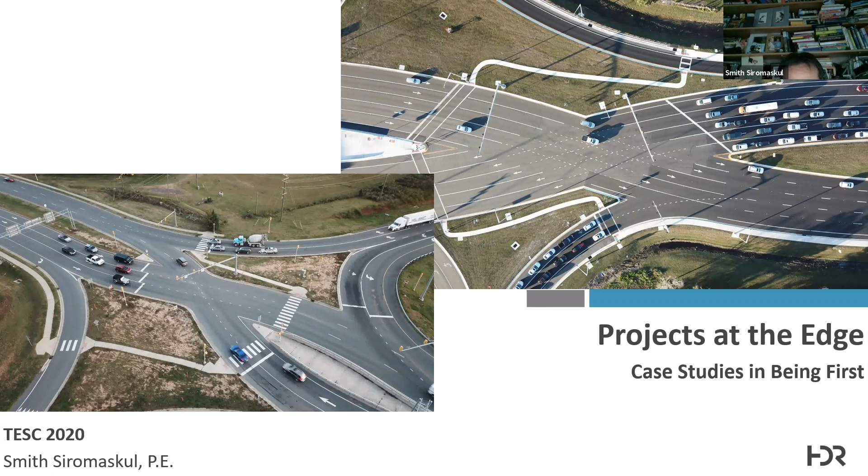So what I want to start with are a couple of projects. I'm going to weave in a couple of case studies, and basically, if you've seen me present before, I'm going to do something a little different this time: I'm going to tell you all the places where I've screwed up in the past. So this is going to cover a lot of lessons learned from planning through design, all the way through implementation. Sorry if my camera is now pointed over my head, but I'm going to be doing some drawing, so that's kind of unavoidable.

But anyway, what I want to point out first is what you see on the screen right now. This is the University Parkway DDI in Sarasota, Florida, I-75 and University Parkway. It is the largest DDI on the planet at this time, with a total of 12 lanes in the interchange core. The old interchange here used to be a standard diamond, and to put this in perspective, the dual left turns at this diamond used to have storage that went back 4,200 feet in each direction. That's how much volume was trying to get on I-75 at this point in time, and that actually comes into play in a little bit later portions of this story.

One of the first things I want to say is make sure you choose the right software. The original concept developed for this interchange was done using simple Synchro analysis, and to say the very least, the number of lanes that were going to be needed here far exceeded what was proposed as part of the original base design. The final design concept was done using VISSIM analysis. Not to say that VISSIM is the only tool, but you really need to look at microsimulation. The reason is that lane utilization coming through the interchange, through the crossovers, how they interact with adjacent intersections, how they're fed by adjacent intersections—all of those play a role in how you need to lay out your interchange.

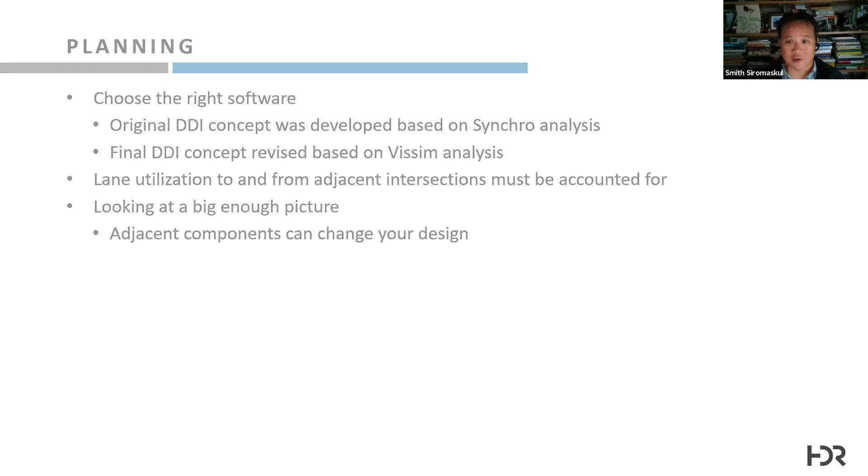Make sure that you look at a big enough picture, because the stuff that's right next door will often change how your project needs to be designed and what needs to be accounted for.

This is the I-85 project, a DDI I put in the ground back in 2012-ish, the first one completed in the state of North Carolina. There was a full access intersection located right here, and no matter what interchange you were looking at—single point, diamond, whatever—the presence of this intersection was going to be a problem. There was also a very heavy movement that wanted to come back this way and either head south or north on 85, and having that extremely limited space between the interchange and that intersection was going to be problematic.

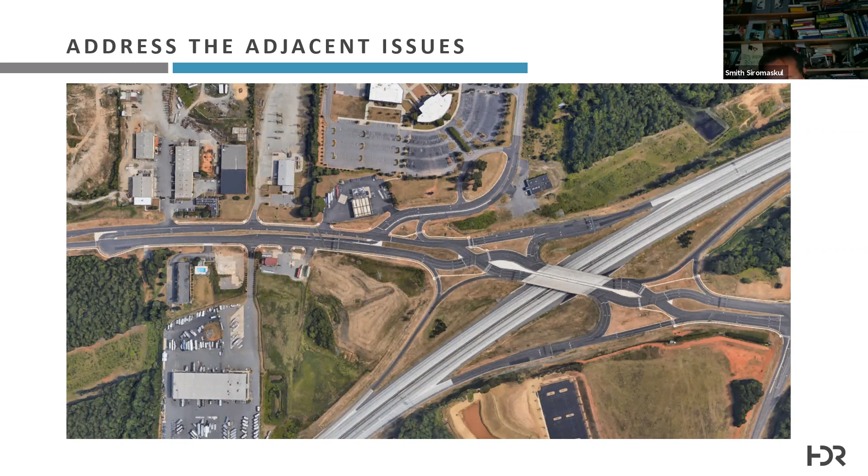So for this project, not only did we look at this intersection and the ramp terminals, which were in scope, but the way we handled that movement ended up extending our project limits off to the west. Basically what you have here is a partial R-Cut, or restricted crossing U-turn, although at the time we put this in, that really wasn't an acronym that was widespread or well known.

This is a mistake that we made in Utah. What you're seeing here is the east leg of an intersection—I forget exactly which one—but this is on the I-15 Core project. We worked on this around 2013, 2014.

Once this was open to traffic, you had 2 lanes coming out of the DDI and a 3rd lane coming off the ramp, with enough width for a 3-lane section. What they did originally was run this as an add lane that continued on down that road.

The problem is, geometrically, this curve coming off the main line doesn't reach its point of tangency until a little ways down that section, and the curve coming across the ramp also doesn't reach tangency until the lanes have merged. This driveway became problematic because people would reach this point and cheat the end of the section, since there was no physical barrier, just paint. So they'd drift across and hit that intersection, causing a lot of sideswipe accidents at that location.

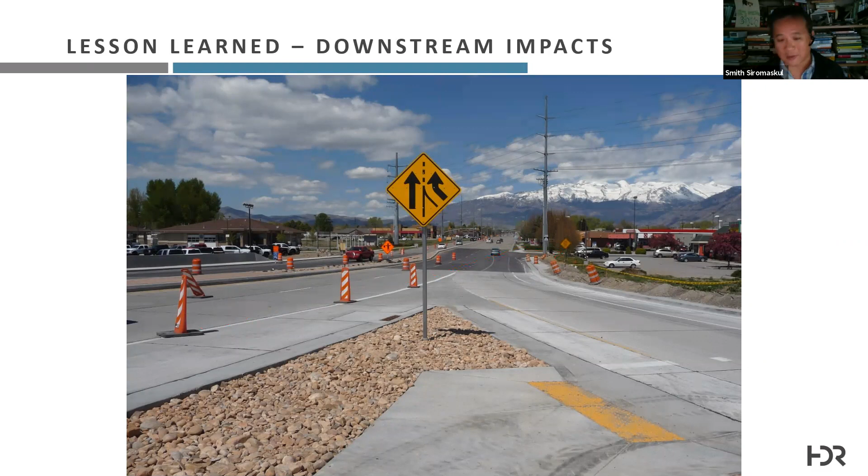That was later mitigated through some additional signing and striping, but the gist of it is we're really not going to do anything like that again.

Now, if your project is limited to the interchange itself, that doesn't give you an excuse to ignore anything outside the bounds of the project. In this case, this is I-25 and College Drive in Cheyenne, Wyoming—far and away the smallest DDI you're probably going to see. It used to be a 4-lane diamond, converted to a 2-lane DDI, with very strict project limits.

We could not modify any of the driveway radii located at those 2 points, and we needed to maintain the existing bridge here and here—basically we just had the section in here to work with. What I want to point out is, we were told we couldn't touch those driveway radii; however, if you look at the driveways, you have a McDonald's over here and truck stops in the other 3 quadrants, so you know there's going to be a lot of traffic coming off the interchange and accessing those driveways, turning left, turning right.

This is the cheapest location to get gas along I-80 in the state of Wyoming, and during peak periods it sees 55% trucks—a massive truck percentage. So for example, we had the capability to have 2 lanes going away from the interchange since we only had one coming through the core. We could have made the right turn off the off-ramp an add lane, but instead, on both sides, we intentionally pinched it down so that right here and right here you're down to a single lane.

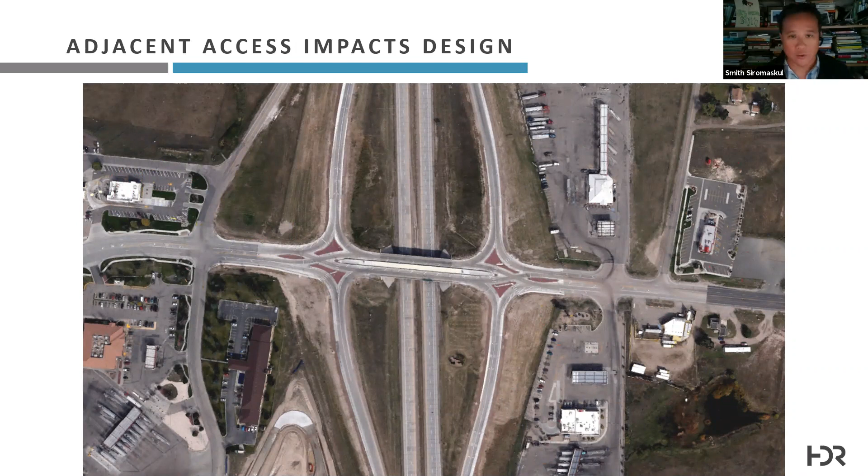So this is an instance that I want to demonstrate, or that I want to get the point across, that what happens outside of your study area, what happens outside of your limits of construction, in some cases will absolutely drive what you do within your limits of construction. So just because it's out of your scope doesn't mean you can just forget about it.

Now, when it comes to public involvement, there's always this fear that, oh my God, you're driving on the wrong side of the street, everybody's going to die, my constituents are awful, what have you. What we found in the DDI implementations we put in so far is that the fear of how the general public was going to receive it was far, far worse than how they actually received it.

What we have done is we've gone out and made sure that in a lot of these firsts, they involved showing people, and oftentimes showing agency staff and elected officials, what it would look like from the driver's perspective. Instead of a normal public information campaign, it was almost more of a public education campaign.

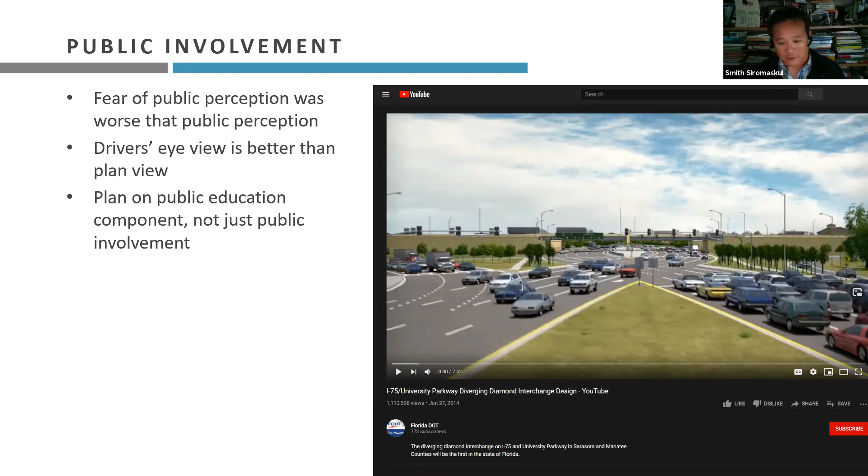And that's something you see on the screen on the right side - this is a YouTube shot of what is FDOT's single most viewed video ever on YouTube. As of the time I grabbed this screenshot, we're looking at just over 1.1 million views.

A couple of different things that we went out of our way to do on this interchange. We had quarterly update meetings, and we invited college engineering students and high school students to attend these to really get a behind the scenes look at what it really takes to engineer a project and get it into the ground.

We used a lot of heavy social media presence on Facebook, on Twitter, and had a project website.

At the public meeting, we had two different things going on. Number one, we had a station where you could grab a wheel, had pedals, and you could drive through a 3D rendering of this DDI. That did not get as much attention as a giant - and I'm talking massive, like 8-foot long - plot of the DDI interchange.

At University, and a pile of Hot Wheels cars that people could actually just manually trace through the interchange. That seemed to be the focal point of our public outreach, and people really, really liked that.

Now, here's the big catch. You need to have staff that's going to be knowledgeable up and down the entire chain, because everyone that people see out in the field is going to get asked, what are you doing? How does this work? Et cetera. So really early on, we realized we needed to create talking points that pretty much everybody up and down the chain involved with the project was aware of.

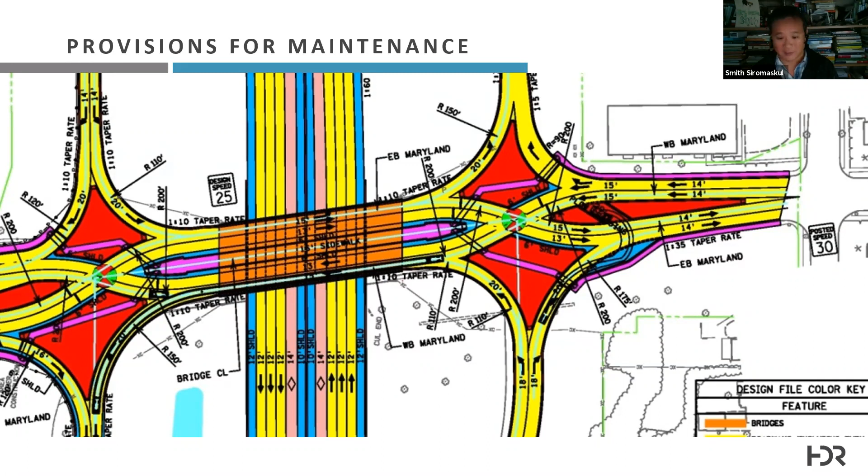This distance right here, if you look, there's actually an AutoTURN template that's in there. And right in this location, we actually modified the alignment to pull the two directions far enough apart to perfectly store snow maintenance equipment inside that median to allow that traffic to go from ramp to ramp when they're actually engaging in snow maintenance activities. So this is another one of those things where something that we don't typically think about affecting design had a significant effect on the design, because we did have to change the alignment in order to make those accommodations.

In construction, one of the things that we did for University Parkway was a very, very heavy social media presence and website presence. And when we were at the public meetings, we collected phone numbers and we texted people updates on MOT changes, design changes, detour changes, and things like that.

One of the things that we noted right off the bat, and you can kind of see it here, I'm going to highlight a couple of these lines right in here. These lines all through here were remnants of the existing diamond striping. And during construction, that made this core of the interchange quite confusing because you still saw the old stripes in there before they were able to lay everything over and get rid of the temporary striping. So it kind of created some complications. It's just something that we did not think about necessarily when we started laying out the MOT for this.

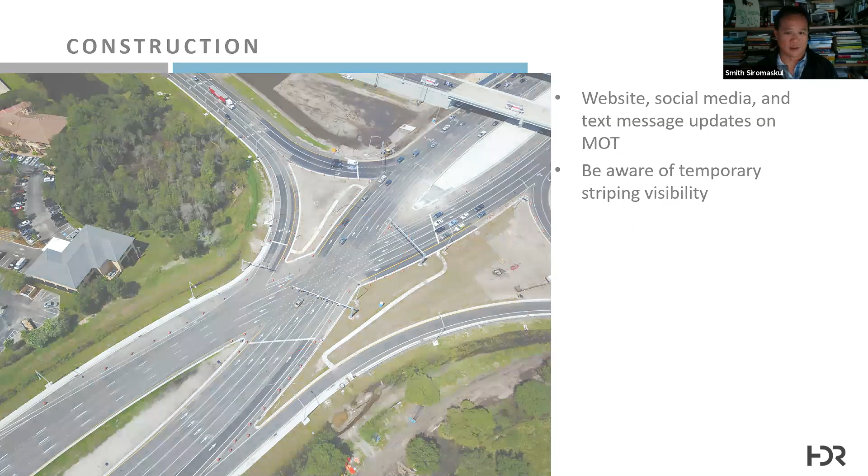Now, post-implementation, there are a couple things that I want to point out here. Clearance time controller issues, you can kind of see the outline that we're talking about there on the left. Now, timing issues. One thing that I want you to call attention to is when the through traffic gets released, the turn traffic in this case gets released. And that'll happen here in a moment where the traffic coming from right to left is going to get its green. And there you go. That right there should not happen.

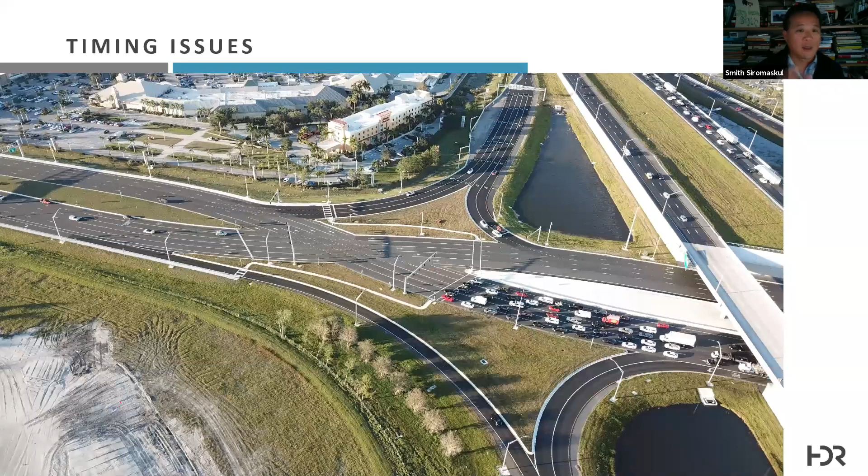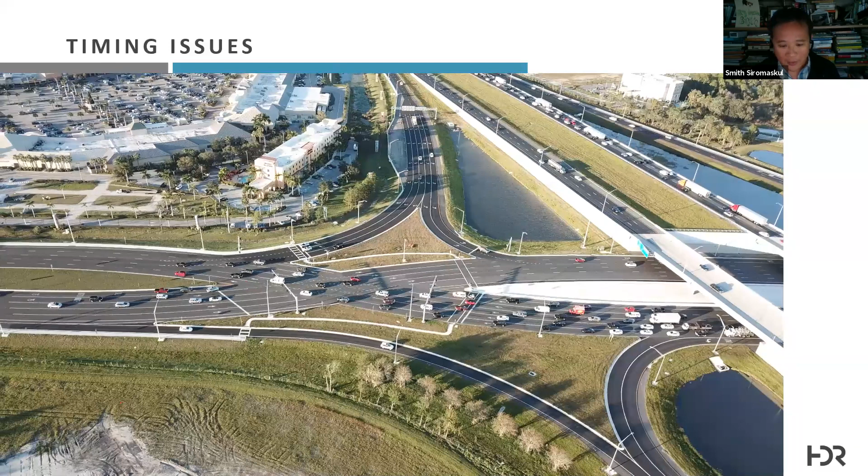Now, what happened here is that the through movement got released and the left turn coming off the off-ramp got released at the same time. The reason I say that should not happen is when you're calculating your yellow and your all red time, you're really trying to calculate it from this point over to this point to make sure that cars can get through that. However, if you include this as part of your all red time, all of a sudden you're really decreasing the amount of efficiency that you have because you're increasing the amount of lost time that signal is going to need to deal with. In reality, what you want is this guy right here, the through traffic, to get that green a little bit earlier than this because you want to delay and you want to trail that signal phase.

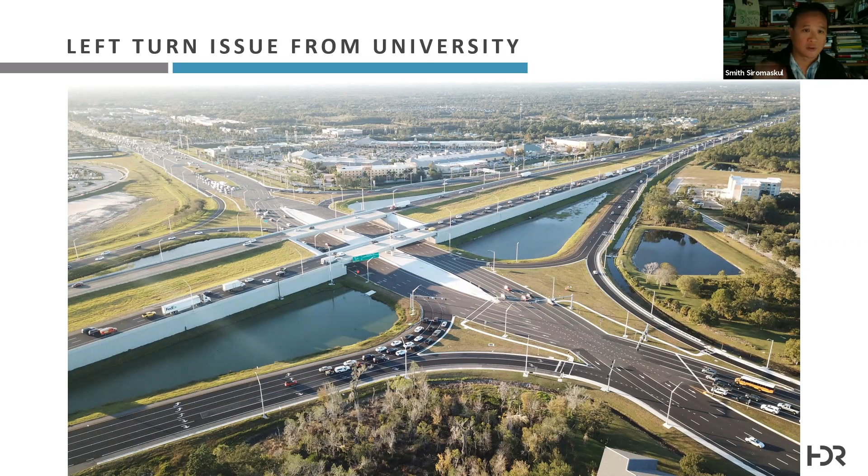The reason that it was not done here on University had to do with incompatibility with the controller software. So make sure that you account for little things like that; it didn't even occur to us until we put this stuff in the ground. The way you're looking at University right now, and this is incidentally also running InSync software along the corridor in real life, make sure that your signal controllers are capable of doing some of the delay and trail green features that you really need to have when you're running this kind of interchange.

Now, the other thing that I want to point out here, stop bars for the ramps are located here and here, which means these signal heads are facing this direction. If you are coming down the ramp, you do not have visibility to those signal heads until you've already gotten to the midpoint of the turn. So realistically at this location, what should have been put in here are auxiliary signal heads looking down the ramp so people can see them.

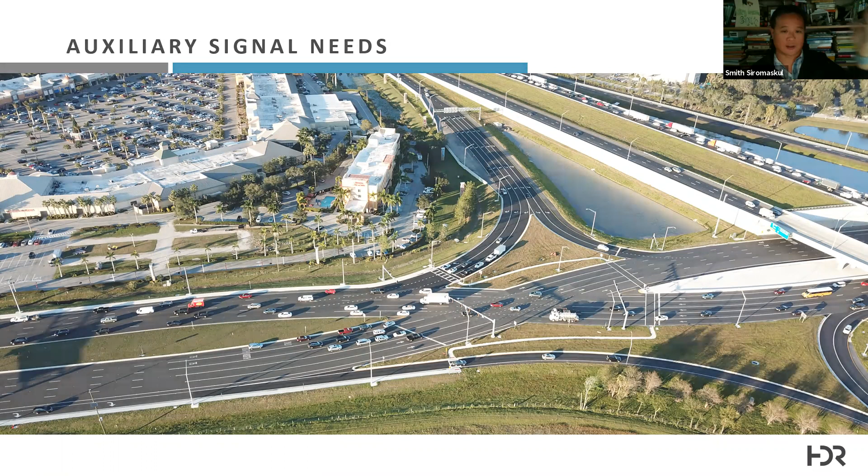Now, when you put in auxiliary signal heads, make sure that regardless of whether or not you can see both the right and left, if you're going to put in an aux head for one, you need to put them in for both, because the DDI is the only interchange type where, depending on which way you're going to turn, there is almost never going to be a situation where both of those heads are showing the same indication. And you don't want a driver to get confused as to which one is green, which one is red, et cetera.

Overhead sign placement. What I'm going to show you here is that we mounted the overhead signs on the near side of the freeway crossing. Whether this DDI is over or under, it really doesn't make a difference. I recently peer reviewed a DDI where they put the overhead signage on what would have been the back side of the core of the interchange. And one thing that they did not check, which ended up being a fatal flaw in that design, was it precluded somebody from being able to get visibility to the signal heads at the crossover intersection.

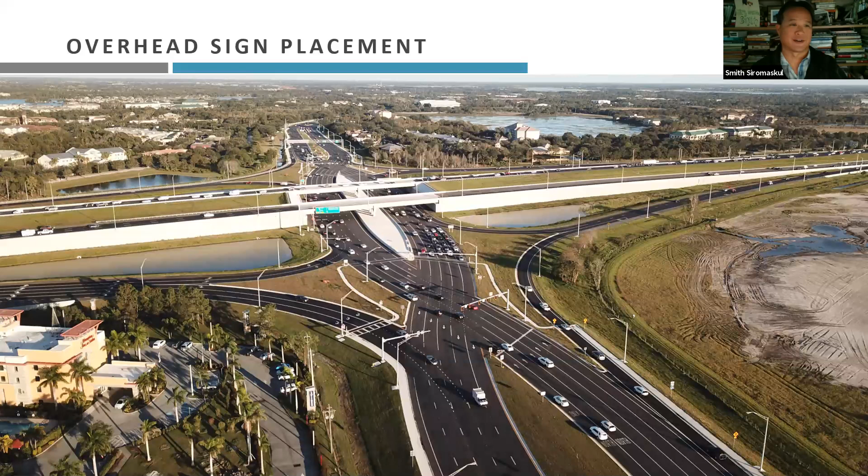Now, this is an example of one other place where we screwed up. This is a mistake that we made very early, and in one case, this is actually a change in standards that would not allow us to do now what we did then. And that change in standard has to do with this. The ped push buttons for both directions, for both the crossovers here and here, are placed on the same pole. Based on new ADA guidelines, those need to be placed at least 10 feet apart on different poles for audio cues. So that's something that we can't do anymore.

It's okay that this crosswalk is perpendicular to the direction of travel. What that does is it minimizes the crossing distance that you have here. This crosswalk, however, really should have been bent a little bit more so it came across like this, so you could get this stop bar a lot closer to your point of conflict. So what I just drew there is the path the vehicle in the other direction would go through that crossover section for a DDI. If you look at where this stop bar is placed, that is a very large distance for you to come to a stop or to realize you're coming to a stop.

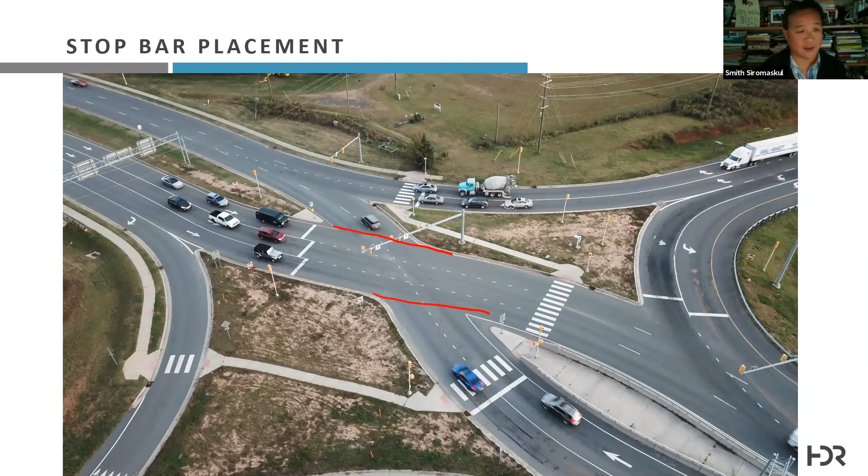If you think about how you drive a traditional intersection and there happens to be snow on the ground or you can't see the pavement markings, you know where the crossover conflict really is, and you're kind of expecting that there will be a crosswalk before that crossover and a stop bar before that crossover. So if a driver comes here and he can't see pavement markings, he's kind of expecting to stop somewhere around here, not as far back as we have them.

So when I went out to this particular spot, and this is in Concord, North Carolina, I noticed a number of locations. Notice that this right now is getting the green. Almost every third phase, we saw a car stopped well beyond the stop bar, well beyond the crosswalk, and kind of in space. So that is a lesson learned that we would not repeat on an interchange like this.

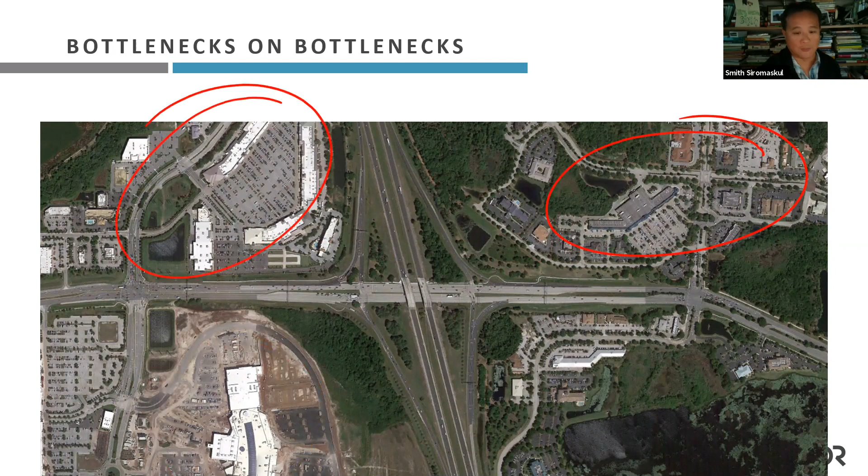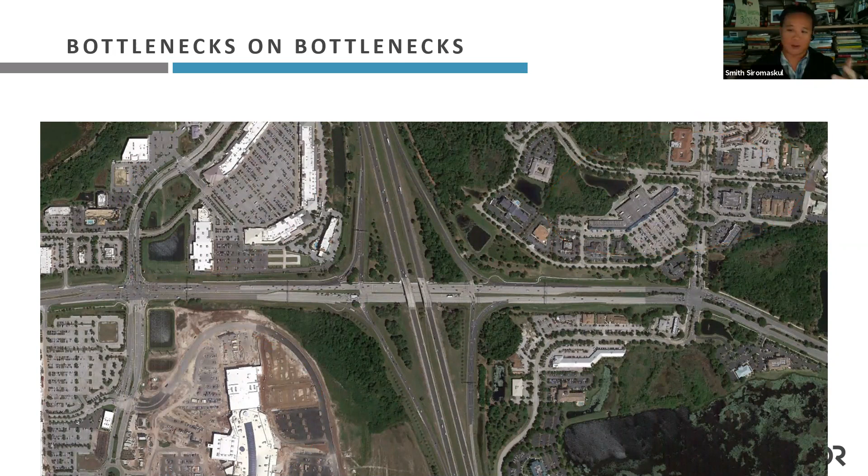Going to the bigger picture, this is University Parkway. This is what it looked like before construction. There's a lot of commercial development up here, a lot of commercial development up here, and a giant regional mall down here. The locals had it in their heads that the interchange itself was the real bottleneck. When we ran the analysis and cleaned it up and made this a DDI, this is what it looks like today on the ground, we tried to tell them, you have other issues that you need to deal with.

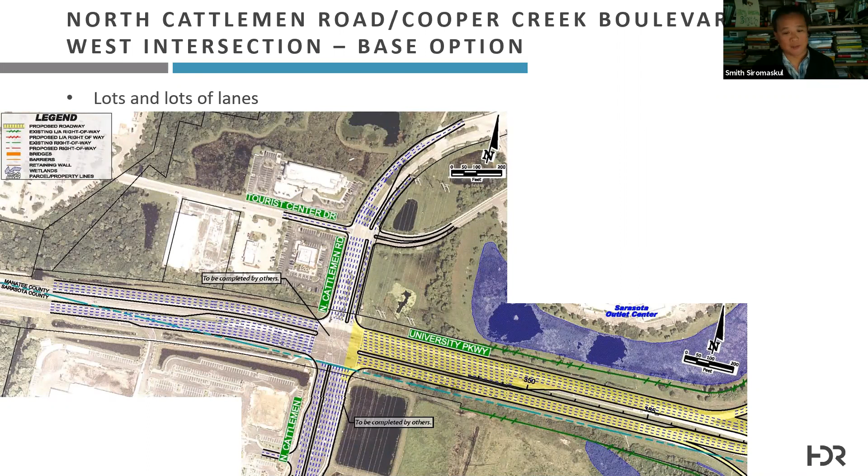And in the previous studies, this is what they thought they needed to do out there. I'm not going to trouble you to count all the lanes, but coming from here to here, you're looking at 14 total lanes from one side of the road to the other. So their approach was to simply throw lanes at this problem and hope it would go away. When we ran the analysis in VISSIM, we found that even in 2028, so just before the year of open, you were looking at 1.5 minutes of average delay per vehicle. By the time you got out to 2038, you were looking at almost 3 minutes worth of delay per vehicle.

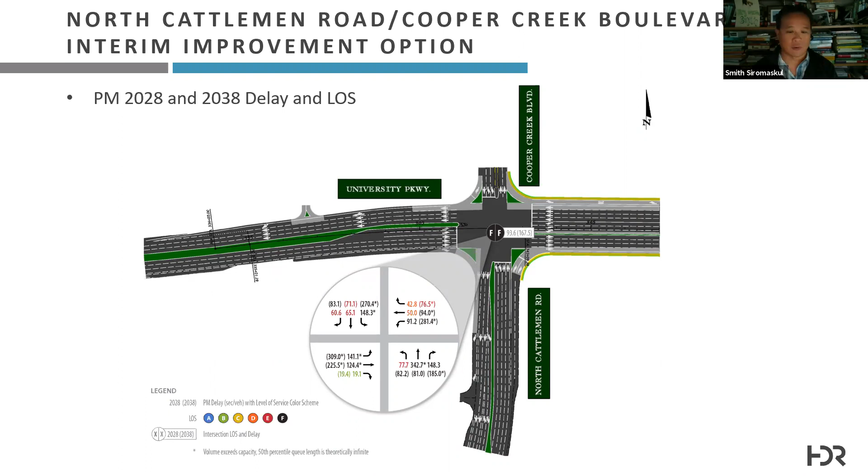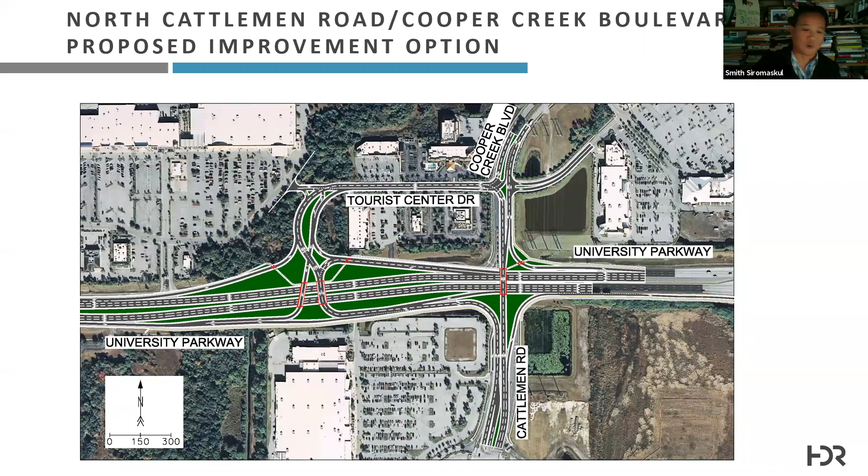And this is for the simple, just keep it the way it is, throw lanes at it and hope it works. It took us a long, long while to come up with a potential fix for this location, but you can see here, it basically involves a partial DDI and a lot of other creative little shuffling of different bits and pieces. And hopefully if this presentation is going to be saved, you can go back at your leisure and stare at this diagram until it makes sense. But the message I want to take home from it is we got the level of service down to LOS B, even all the way out to 2038.

But we tried to tell them, if you don't fix this, it is going to be a problem. Today, it is a triple left turn that they've put in for that. It is a triple left at a standard style intersection. The storage bay length is around 2,700 feet, and it overruns almost every single cycle during the PM peak period.

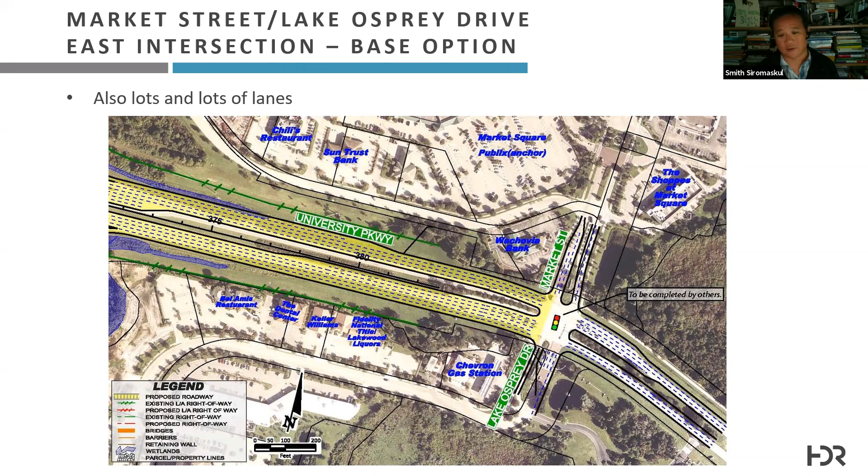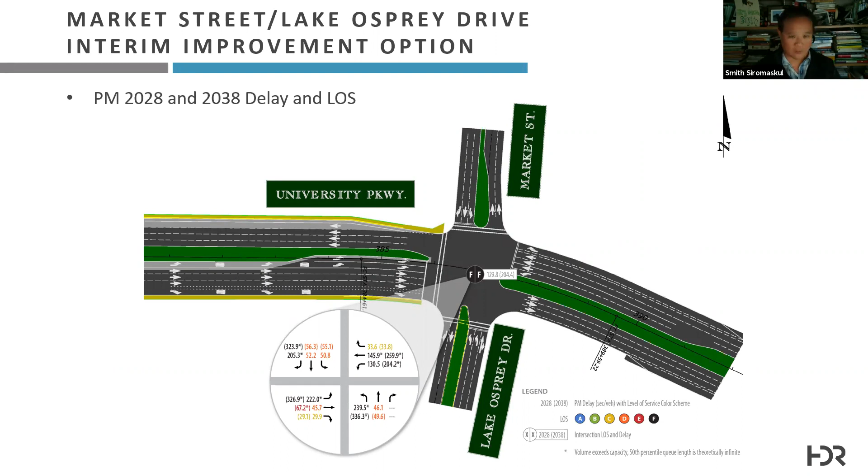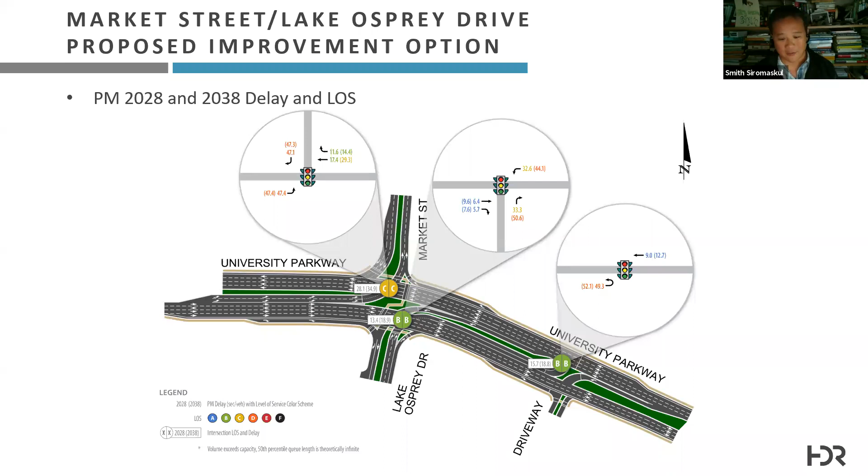Now, here's the thing that I forgot to mention. The interchange belongs to the state. The intersection to the east belongs to Sarasota County. The intersection to the west belongs to Manatee County. And nobody wanted to pony up any extra money to fix their intersections, which is why the DDI became the DDI and why the adjacent intersections were left alone. The county has come to realize that this intersection improvement is necessary, so they've gone ahead and started this one well into design. The intersection off to the west is still a train wreck that we kind of expected it to be.

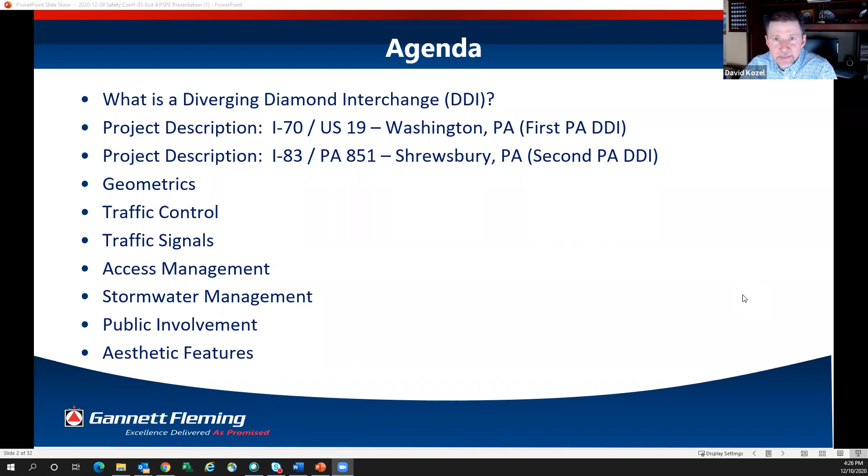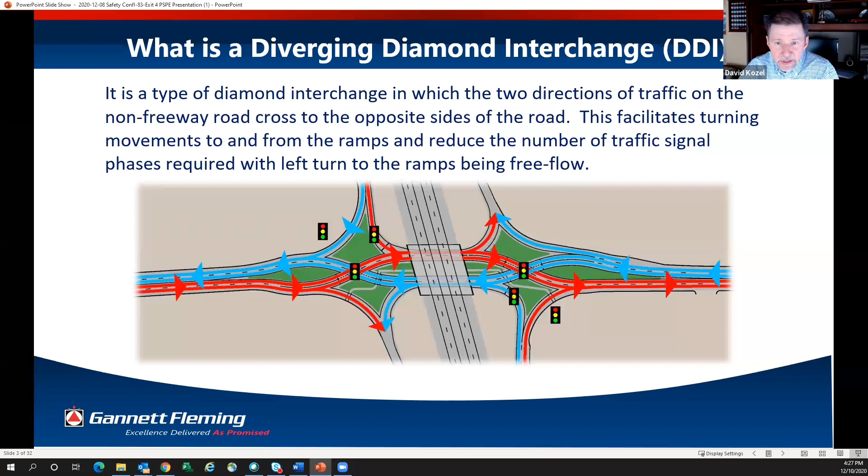First, what is a diverging diamond? The previous presentation really gave you an idea. It's a diamond type interchange. The roads within the interchange, beneath or above the interstate, are crossing over to the opposite side. What this does is facilitate movements to and from the ramps and actually reduces the number of traffic signal phases. One of the major advantages you'll find is the left turn movements to the ramp. If you see in the diagram, they're a free flow movement. They are not controlled by the traffic signal at the intersection.

The first project we'll talk about is the I-70 Route 19 Washington, PA DDI. The final design team was Gannett Fleming and Tri-State under the Department of Transportation, and the prime contractor was Golden Triangle. There were other team members, but we apologize if we couldn't name everybody on here.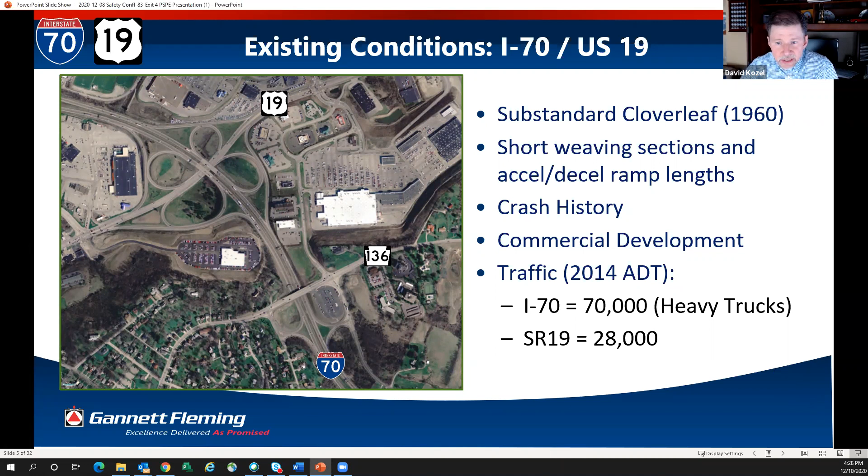Traffic in 2014 was about 70,000 cars a day with heavy truck percentages. And on Route 19, it was 28,000 a day.

The solution obviously came down was a diverging diamond interchange. That diverging diamond interchange actually allowed the existing bridges carrying I-70 over Route 19 to be maintained. Even though we redecked them and did some grade changes, those bridges stayed in place. Those were dual 3-span bridges. Also, the diverging diamond allowed us to reconstruct the interchange within the interchange footprint, which minimized right-of-way impacts.

In fact, the whole project itself, I believe, had 8 property impacts. They were all strip takes, no displacements.

This project also widened I-70 from 2 lanes to 3 lanes and included a 4-lane section in each direction between this interchange and the Route 136 interchange just to the east.

One of the challenges with this diverging diamond interchange was the grades and the curvature on I-70 and Route 19. As you can see in this picture, I-70 was on an upgrade about 3% from west to east, and Route 19 was on a 3 to 5% upgrade through the interchange from south to north. Those curvatures came into play as we designed this interchange.

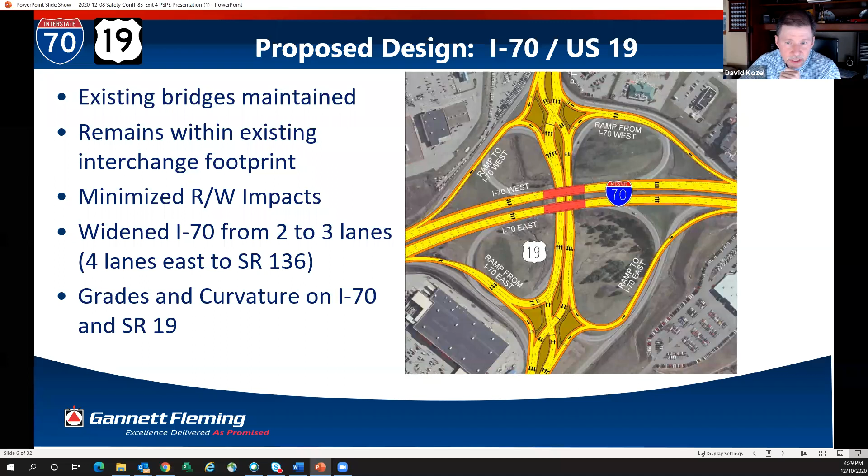The existing conditions: we had a tight diamond interchange, and similar to I-70, a lot of commercial development immediately adjacent to the interchange.

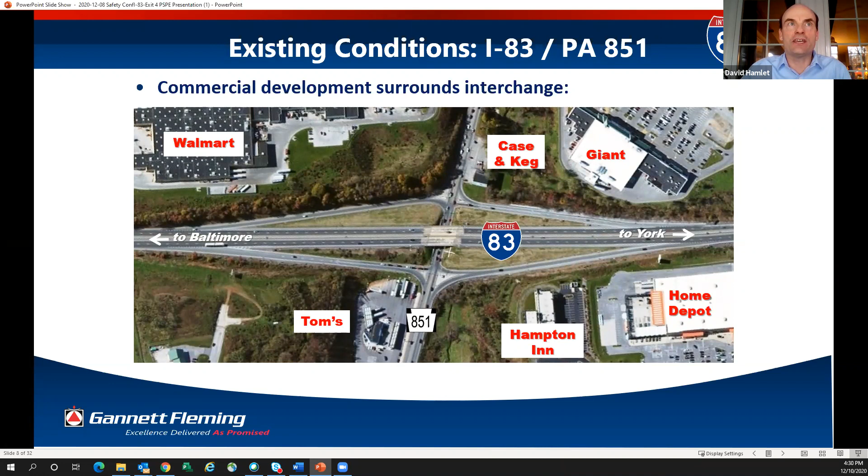The traffic on I-83 is about 53,000 vehicles per day. And on the crossing street, pictured down below, PA 851, about 19,000 per day.

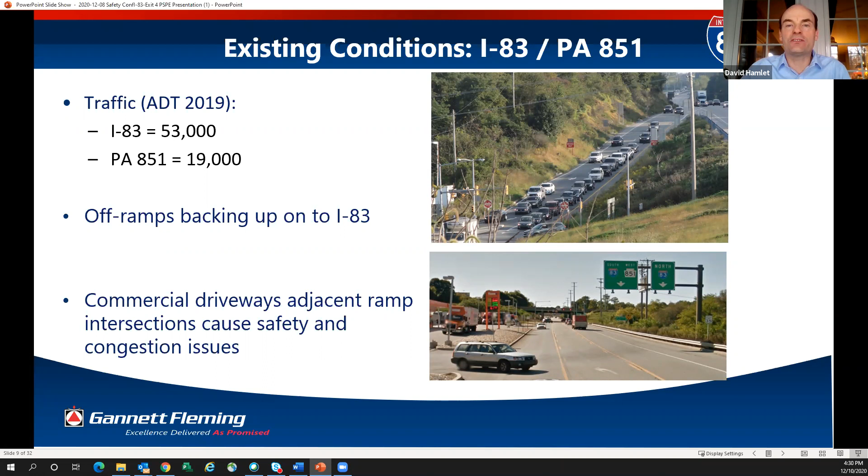The overriding purpose of the project was to correct the safety issue with the ramp backing up onto I-83. As you can see, it's getting close to doing that in the top picture. And down below on the side street, there were also some driveways that caused congestion and safety issues as well.

With it being a tight diamond, 3 lanes, so it had a center left turn lane. And as you can see, it doesn't take too many vehicles, especially large vehicles, to clog up the interchange and cause congestion issues. The geometrics did not accommodate large vehicles.

Now the solution, our DDI solution here: the I-83 bridges were replaced, and that allowed the crossing road 851 to be widened to 2 lanes in both directions.

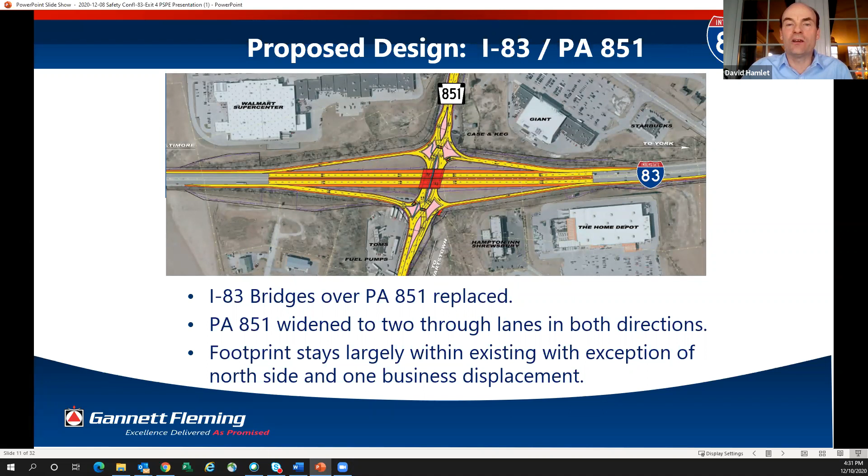And just like the I-70 project, the footprint of our DDI in Shrewsbury stays within the existing footprint, with the exception of the widening along 851, which did cause 1 business displacement.

So as Dave mentioned, first we're going to talk geometrics and compare our 2 interchanges. For the I-70 DDI, there's 1,100 feet in between crossovers, and that really allowed for a few different things to happen.

First of all, it allows the median island to be tapered back down to existing conditions through the majority of the area between the crossovers. This allows the existing bridge to be saved - they were rehabbed instead of replaced.

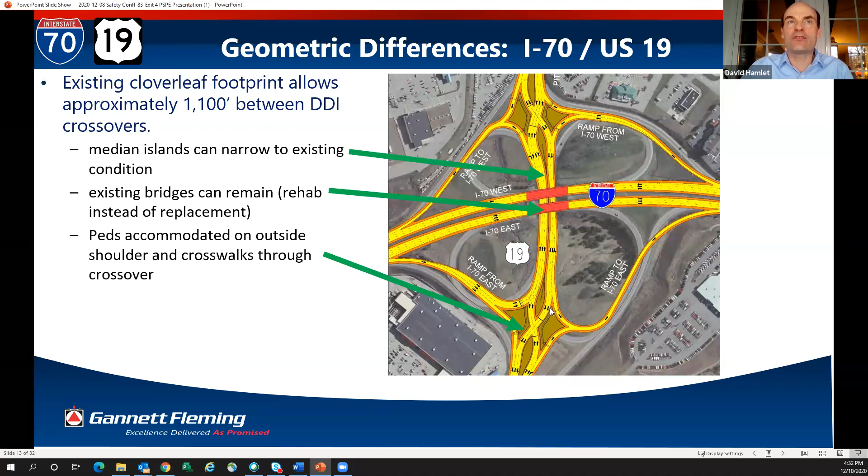And by having a narrower median, pedestrians are accommodated on the outside, on the shoulders, and then there's crosswalks through the crossover area. To contrast, on I-83, there was less than 300 feet in between crossovers.

And so the median island stays full width in between the crossovers. With the median island wider, that means the bridges need to be replaced - they cannot just be rehabbed. And it makes sense at that point to route the pedestrians through the median of the DDI rather than along the outside.

Now, going back to I-70, as Dave mentioned before, US 19 is on a curve. And because of that, the entire roadway is sloped at reverse crown. So really there's no difference to the driver in the before condition to the after condition.

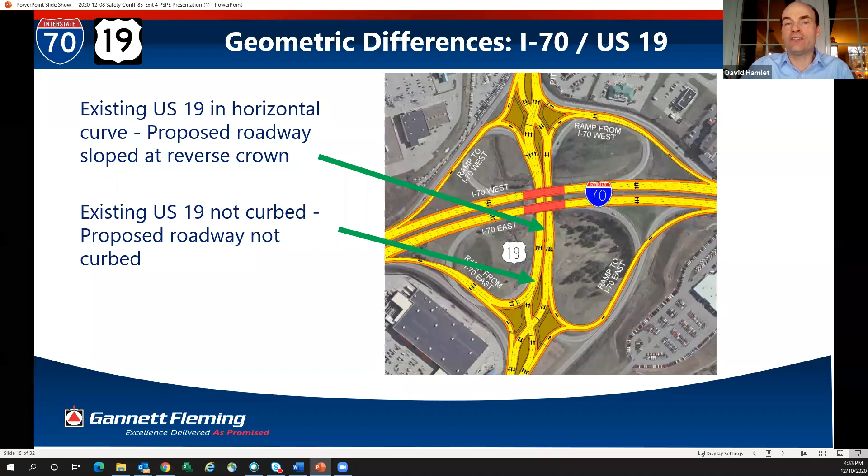It was not curbed in the before condition, so the proposed was not curbed either.

Contrasting that with Shrewsbury, I-83 exit 4, 851 is generally tangent. With slower speeds through a DDI, this one was designed for around 25 miles an hour. The pavement was sloped at 2% from the median out towards the shoulder, which would normally mean normal crown, but with traffic on the opposite side of the median through the DDI, it ends up being reverse crown.

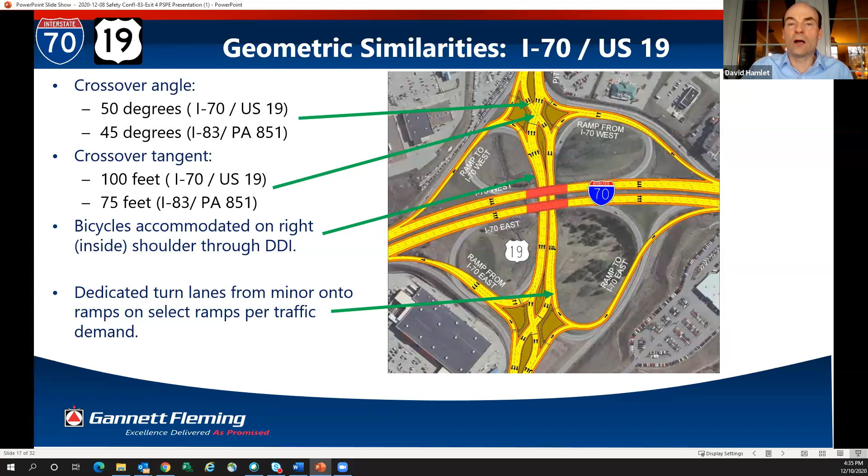The existing condition was curbed, and so that was kept through the proposed. Now to some similarities in geometry: the crossover angle was very similar between the 2 DDIs, as was the crossover tangent length. In both DDIs, the bicycles were maintained along the right shoulder, which ends up being the inside shoulder through the DDI. And in both interchanges, there were dedicated turn lanes, either to or from the ramps where traffic volumes warranted.

I will start going through some other things to contrast these. Traffic control for an implementation of the DDI in any interchange is important, and I'll go through each one.

On the I-70 US Route 19 project, with the traffic volumes there, we basically had to maintain 2 lanes of traffic in each direction on both I-70 and Route 19. We had no ramp closures during the phase construction. During phase construction, we actually went through 4 different interchange types. The first was the existing cloverleaf. Then we went to a temporary trumpet using the western side of the interchange. Then we went to a long-term temporary diamond interchange, then to the DDI interchange itself during construction.

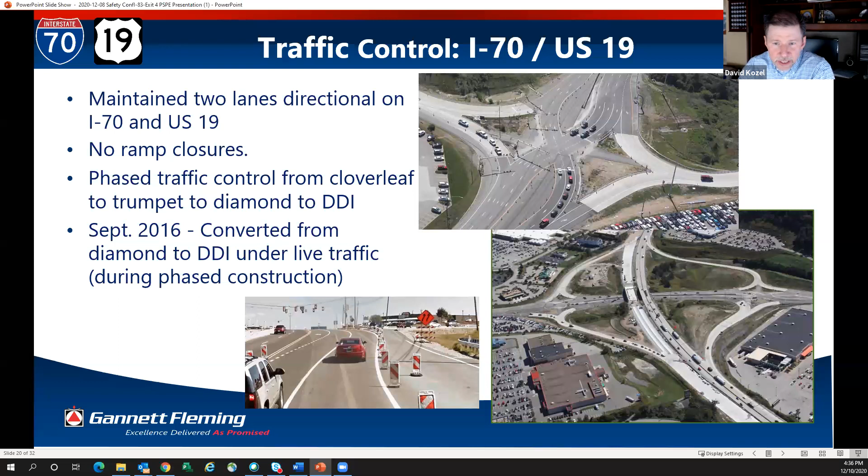On the I-83, it was a little different. One of the critical features was the bridge over 851. That bridge was over widened so 2 lanes could be maintained in each direction at all times. In the end, that bridge will be able to handle 3 lanes directional in the future. One of the things the contractor will be doing on this one, similar to Route 19, is the DDI will be implemented at overnight shutdowns, which was a lesson learned from the US 19 project.

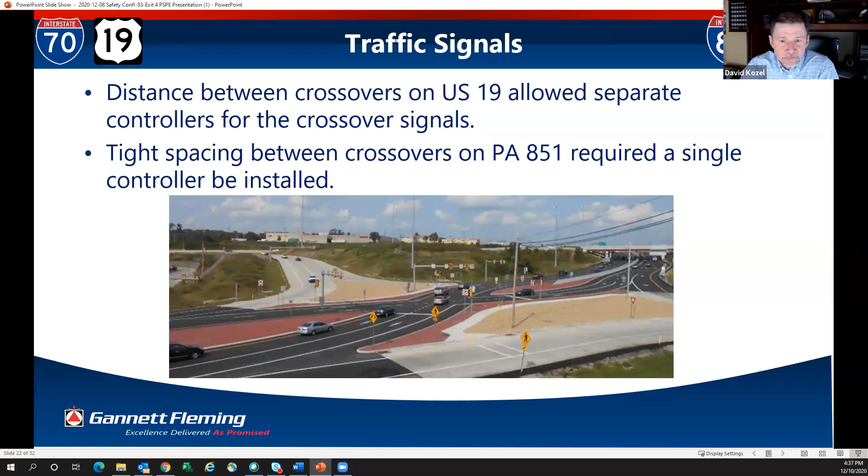Traffic signals are another important component of the intersections. As Dave mentioned, the distance of the crossovers on the US 19 allowed for 2 controllers to be used, one on the north and one on the south. The tight spacing of the crossovers on 851 Shrewsbury meant that intersection only had 1 controller. That's something you definitely want to coordinate as you develop your DDI, whether it's 1 controller or 2.

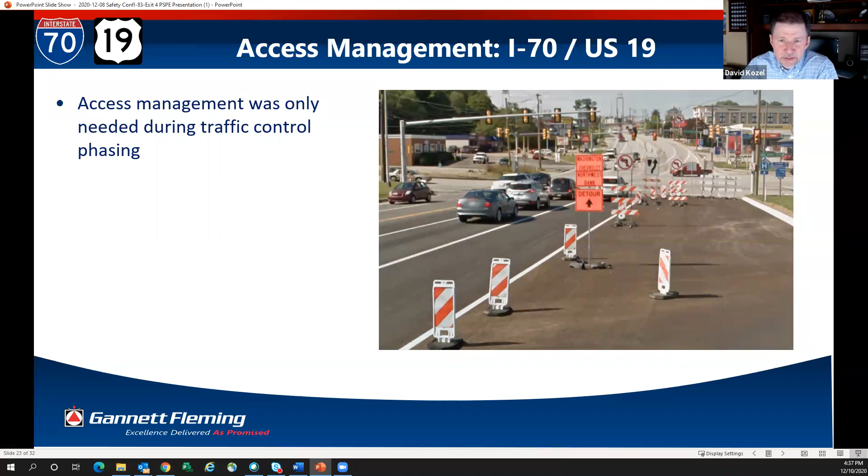Access management is another component. On I-70-19, most of our access management was during construction, as Route 19 was reconstructed primarily within the interchange limits up to the adjacent intersection. One of the only things we had to do was run a detour for a left turn onto a side road, which was a car dealer. We ran a detour to the south and came back. But most of our construction was within the interchange area.

On Shrewsbury, as Dave mentioned before, there was 1 displacement. There was also a consolidation of driveways in order to remove a driveway that was closest to the DDI. So this project actually had a little more involvement with private properties adjacent to the interchange than the I-70 at 19 did.

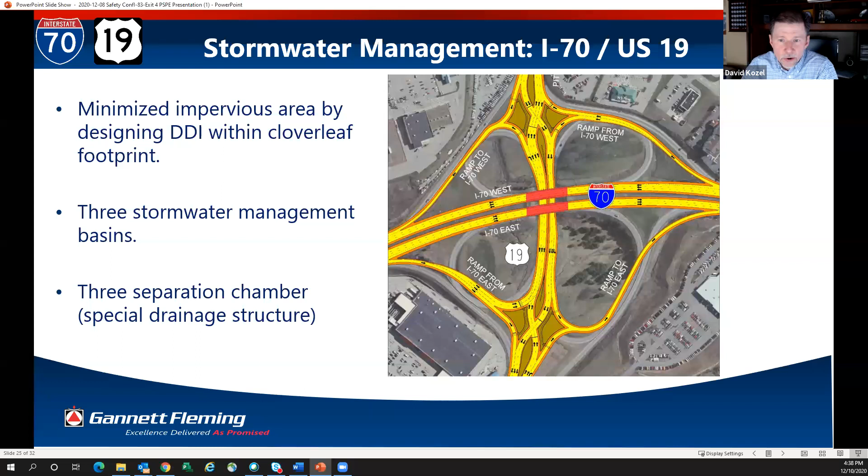A little bit of difference on the Shrewsbury 851 site was that it was a tight diamond with steep infield areas and limited room for basins. The design included vegetated swales, bioretention basins, and an impervious basin. Part of this was located within a public water supply area. The primary purpose was to mitigate for the over widening of the I-83 bridges and the wider footprint of 851.

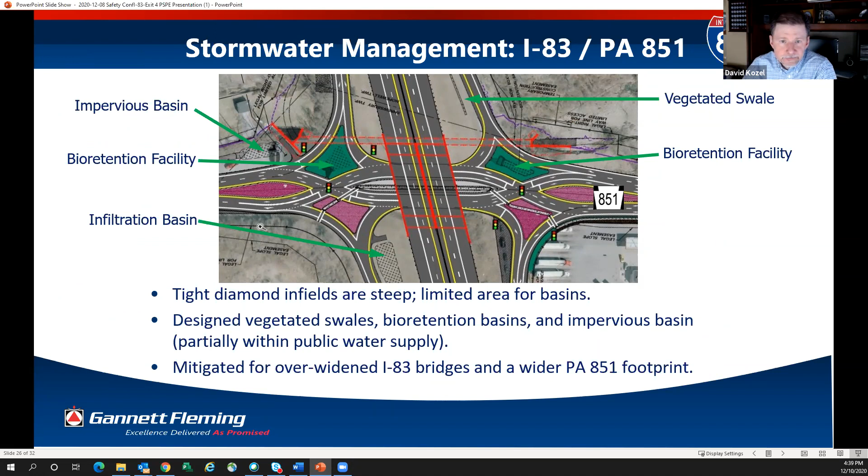As far as public involvement, it was similar for both projects. Both had public meetings and project websites. For the I-70 US 19 project, there was a 3D visualization done to show people what it would look like to drive through that DDI.

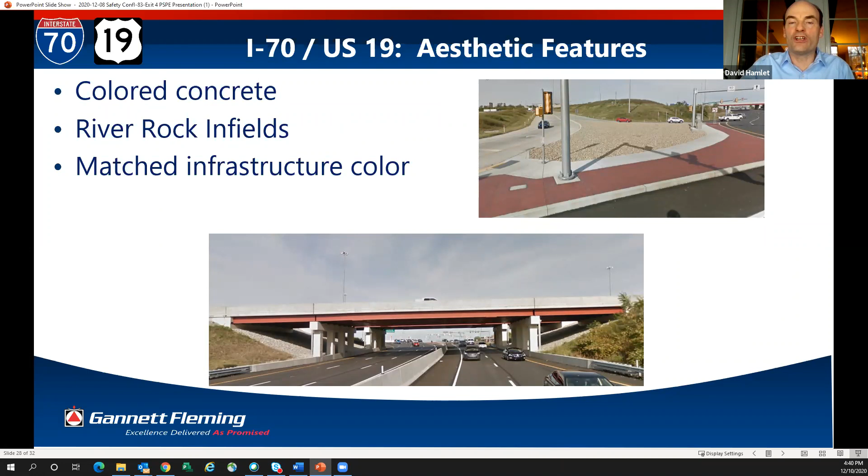That same video was later used on the I-83 Exit 4 project. Turning to aesthetics, out in Washington, PA on US 19, there is colored concrete, as you can see in the top photo, along with river rock infields. The infrastructure color, the overhead bridge, was made to match that.

In Shrewsbury, with this being the first exit coming into Pennsylvania from Maryland, PennDOT wanted more of a welcoming statement. This involves a flagpole, curvilinear dry-stacked terrace walls, and tiered plantings. Those were partially financed and are being completely maintained by local municipalities and civic organizations, so they'll be recognized on a beautification acknowledgement sign.

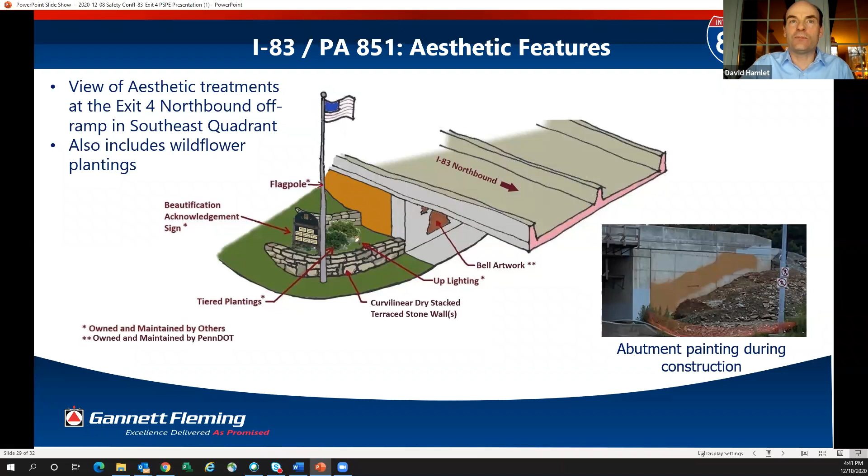The bridge will have some painting on it as well, and underneath is some steel artwork. There's a Liberty Bell, and script writing that says life, liberty, and the pursuit of happiness. In addition, there are wildflower plantings through the interchange area, again just to make a nice welcoming statement to people coming from out of state.

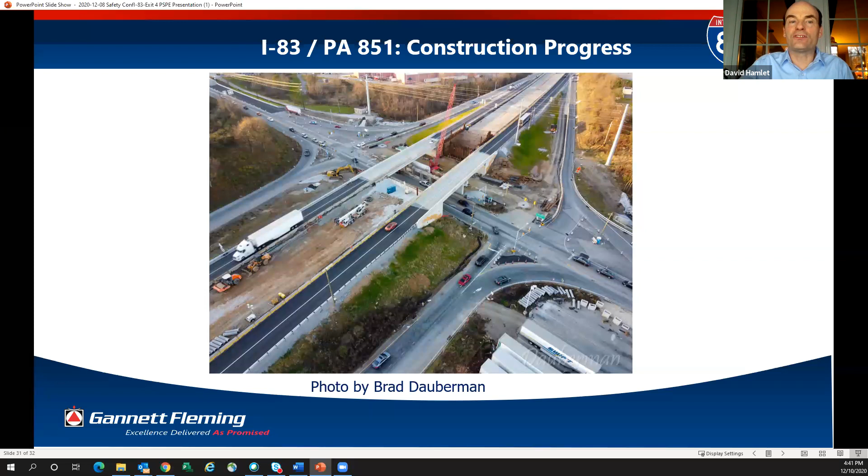All right, that's great. Thanks, Dave and Dave. Does anybody have any questions for the Daves?

Smith is answering one right now. Okay, well, let's get Gil going, and then if we have time at the end, we can always answer. Feel free to respond in the chat or in the Q&A if you don't mind.

Okay, Gil, you're up. Thanks, Mike. You see my screen? Yep, you're good. Awesome, all right.

So I'm going to try to leave a couple of minutes at the end. The good thing is that because I had two presenters before me, they did such a great job, I might be able to reference them beforehand to save a minute or two.

So what we're going to talk about here is some of the PennDOT DDI peer reviews that we've done, and the lessons learned beyond the guidebook from these peer reviews.

Is it going? Is it? Not yet. Why is it going forward? All right, there we go.

The Federal Highway DDI Informational Guide is a great resource for getting started with DDIs, but it has many limitations. DDIs are viable options in more cases than described in the guidebook. It was developed in August 2014, when there were only about 12 to 18 DDIs in operation. It discusses optimal conditions, and in some cases the geometric guidance is too strict, while in other cases there's not enough guidance.

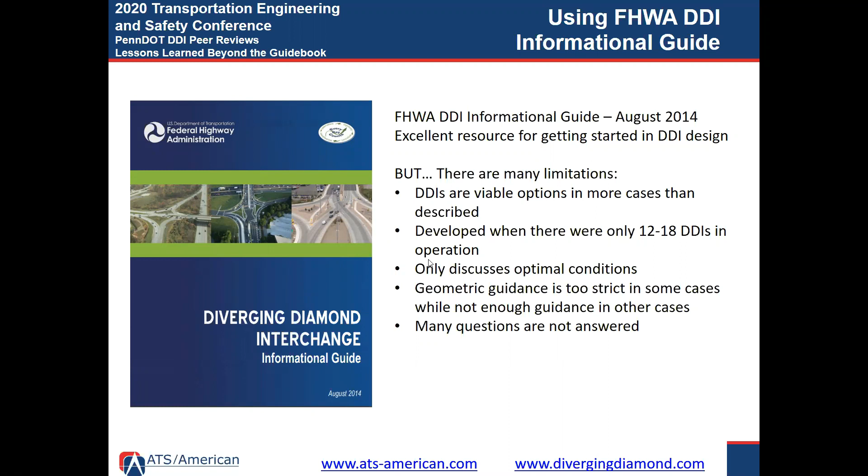The first DDI peer review we did, the one on the left, is I-70 and SR51 in Southwest Pennsylvania. The problem here is mainly a safety issue; I-70 has a below-standard cloverleaf, and they need a new bridge. A DDI seemed like a good solution here for safety and cost.

The one on the right is a DDI proposed at US 422 and Penn Street, a very urban cloverleaf. Even though the cloverleaf itself doesn't seem urban, to the east is downtown Reading, and to the west is the commercial district in West Reading.

This is a very interesting location because you have these constraints. To the east is the river crossing, and to the west you have a railroad crossing. So we have this alignment issue combined with these constraints at the east and the west, and we've got to fit in a DDI in this location.

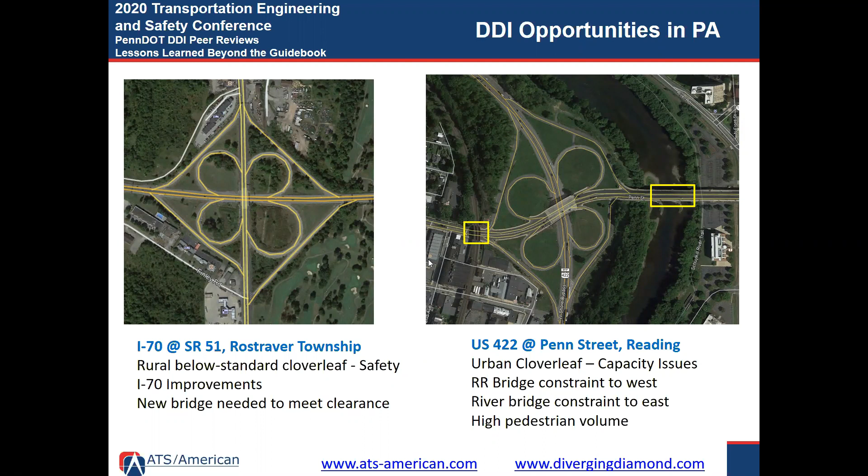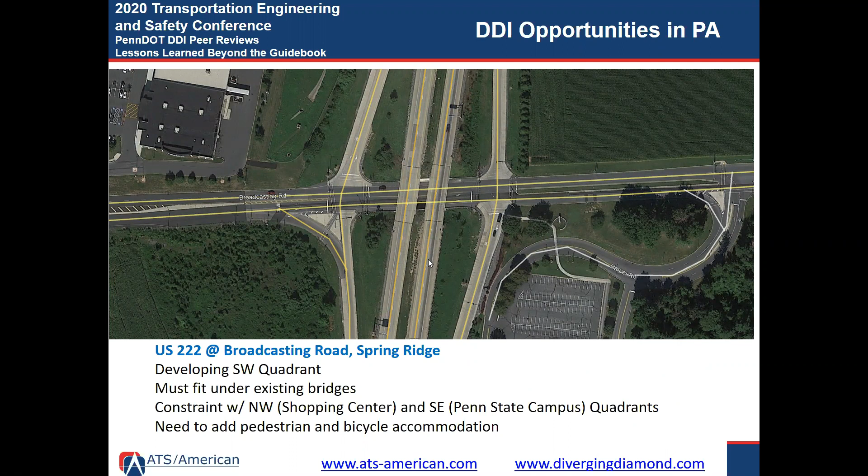This project here is the US 222 Broadcasting Road location, just northwest of Reading, that has capacity issues and pedestrian volume as well. Here we have development coming into the southwest quadrant that requires more capacity. And you have constraints where this bridge needs to remain - you can't touch the bridge, and you only have limited room underneath it.

To the northwest and southeast, you can't touch those quadrants. The northwest is a commercial strip, and to the southeast is the Penn State Satellite Campus. So you've got to fit this in a very tight location. At the same time, because pedestrians and cyclists are going from the campus to the shops in the northwest, you need to make sure you're adding pedestrian and bicycle accommodations.

This is the US 22 Pennsylvania 145 project just north of Allentown and Whitehall. In 2012, as you see in the picture in the upper right, it used to be a kind of funky cloverleaf, and they made improvements, making it a partial cloverleaf. But now with a new bridge, 22 is being widened and we need to convert this. We're hoping we could convert this to a DDI and be able to use the auxiliary lanes for the loop branches to make them into through lanes for the widening and save the bridge.

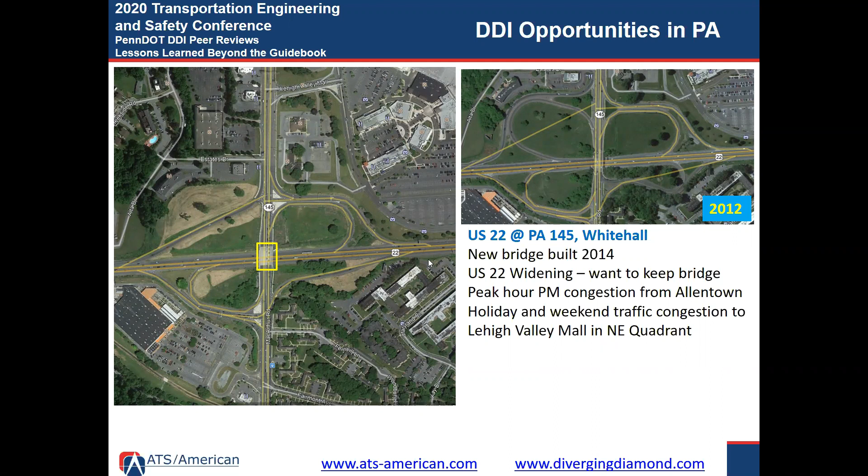There are congestion problems with DDIs potentially - we're talking about during the PM peak coming from Allentown, and also during holiday and weekend traffic going to the mall in the northeast. Again, we've got to save that bridge. We must - that's a concern we must deal with over here.

This project is the 33 William Penn Highway project in Bethlehem, just to the side of Easton, where we have development happening on both sides. Again, we need to fit everything underneath the existing bridge, and there's significant traffic being generated to the northwest quadrant - that's a park and ride lot to the northwest, and there's going to be more development to the north. So we've got to figure out how we can get this all to fit within some tight constraints.

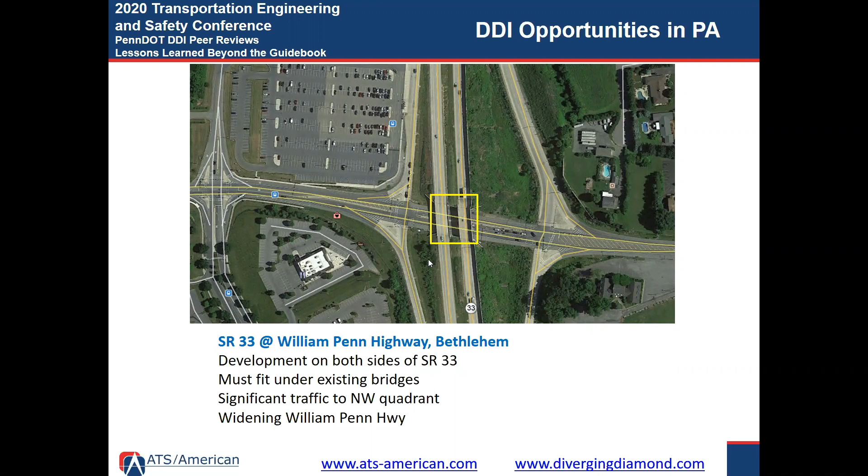So when we're doing these peer reviews and we get these projects, there's a lot of things that can't be answered in the guide, and that's where we're going to spend pretty much the rest of this presentation - on all these questions. The good news is that there should be a second edition of the DDI informational guide coming out very soon. I was really hoping it would be published by now, but it's not. There are actually preliminary chapters for the operation that were published in 2019. If you do a Google search of NCHRP 03-113, you can find it. Soon there'll be some ped/bike and geometric design chapters published, hopefully within a short period of time. So let's go through some of these questions.

First, can the DDI actually work operationally? The answer is always yes, but it's kind of a trick question - I can always add more lanes and make it work, but when you add constraints, that's your real question: can the DDI actually work operationally based on the constraints of your particular project? So how do you figure this out? You use the right tool and technique for simulation. Smith did a great job in his presentation and Q&A talking about this, so I'm not going to go into that further. But I do want to talk a little about the geometry playing a major role.

Spacing between the crossovers is important for operations. Number of lanes possible on or below the structure - can we narrow the lanes, or can we add another lane possibly? Coordination with the other signals and driveways.

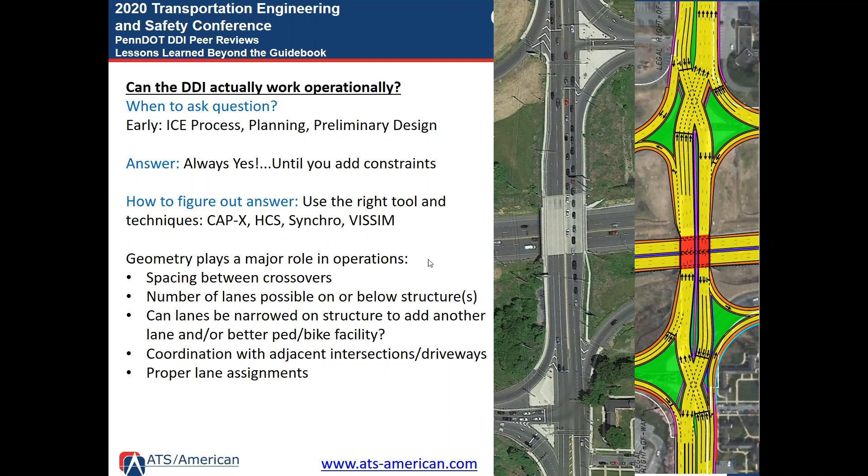Can a DDI fit in a tight context? Well, usually we can, but it may not be the optimal design from the guide, and that's where things get kind of tricky.

So we got to do what we might call 'quote unquote' suboptimal designs. You might say, well, it's suboptimal, we can't do that. But the truth is the DDI will probably be significantly safer than the alternative. We've seen several safety studies showing DDI reduces crashes by 35% compared to simple diamonds, and reduces injury crashes by 65%. These studies included both optimal and suboptimal DDIs. So we know DDIs will reduce crashes. If we need to go somewhat suboptimal, it may or may not have an effect on safety, but if we design it correctly, it probably will not.

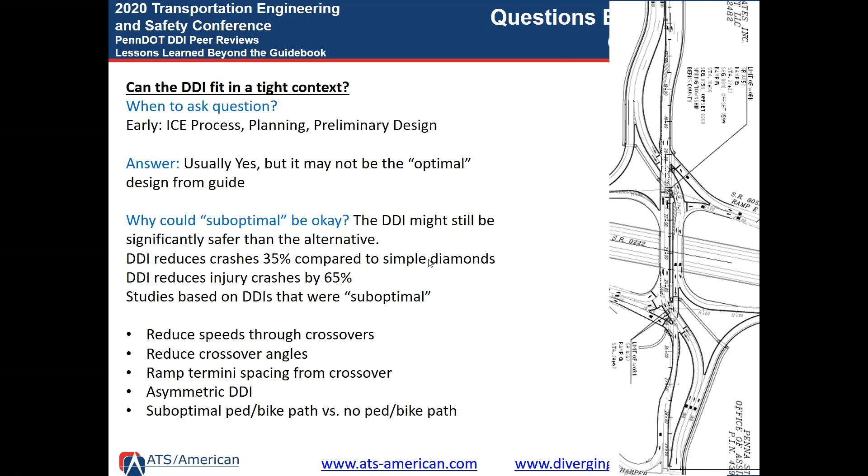Some of these quote unquote suboptimal things we can do: reduce speeds, reduce the crossover angles, have asymmetric DDIs, and have suboptimal bike paths. You see an example here on the right where we had to fit the DDI underneath the bridge. This is the one just northwest of Reading on Broadcasting Road. We were still able to maintain 2 lanes each direction, and put in a 7-foot wide bicycle/pedestrian facility in the median. Ideally, optimal would be 10 feet minimum, but 7 feet still works.

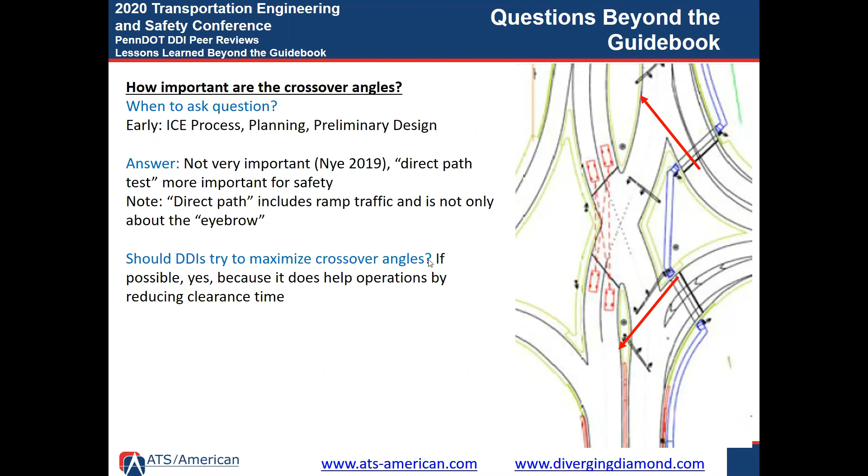So you still get a lot of value, even though it's not optimal. Crossover angles - Smith and I have both talked about this, that the most important element isn't really the crossover angle, but the direct path between the through movements where you might get a wrong-way movement. We now have research that proves that. So the crossover angle doesn't have to be 45 degrees like it says in the DDI book, and that element will likely be eliminated from the next guide based on the preview I've seen. But keep in mind the eyebrow, which is the angle for the through movements - we also need to worry about the direct path for the ramps, making sure traffic cannot get to the opposite direction and cause a wrong-way crash.

How should ramps be designed? The answer is really different depending on the off-ramp and the on-ramp. For the off-ramp, the main concern is the clearance of vehicles and bicycles. But for the on-ramp, the concern is mainly the queues from the crossover blocking the ramp access.

If you're going inbound into the DDI towards the bridges, the bicycles and pedestrians, if they're in the median, they'll be towards the center, so the ramp traffic making a left turn won't be close to the pedestrians and bicycles. Now for the on-ramps, it's the opposite. If you're having traffic peeling off of a lane to go to those on-ramps, you want to lengthen that distance as much as possible so queues don't back up and block access to the ramps, because that causes both operational and safety problems.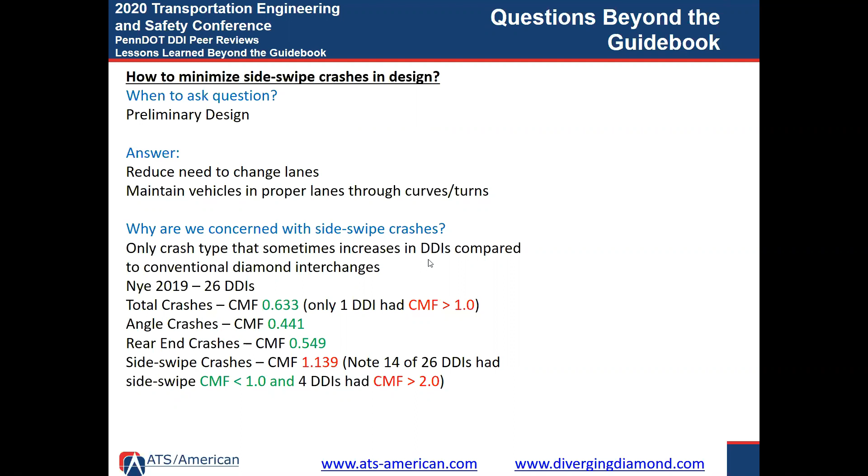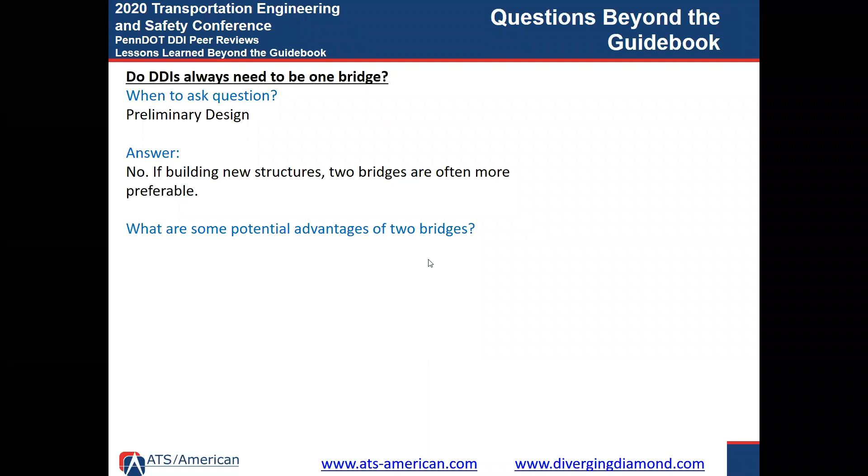So, do DDIs always need to be one bridge? This was a question that came up on the Cloverleaf DDI project in Southwest Pennsylvania on I-70, and the answer is no, you don't need one bridge for a DDI. If we're building new structures, 2 bridges are often more preferable. You get nice advantages with 2 bridges because you have better crossover design, better intersection sight distance from off ramps, more flexibility in the design, and easier maintenance of traffic during the design.

So 2 bridges is better than one if you can get it. Doesn't mean one bridge won't work, and if your constraints require one bridge, that's perfectly fine. But if you have the option of 2 bridges versus 1, 2 bridges will often be better, and usually will not be much, if any, of a cost increase.

And so when you sign it like this, sometimes you can get lane imbalance, and that's not often shown in your simulations. So make sure when you design a DDI, design it so you can sign it. And you've got to look at this really early. Look at your signing really early. It could affect how you design your DDIs.

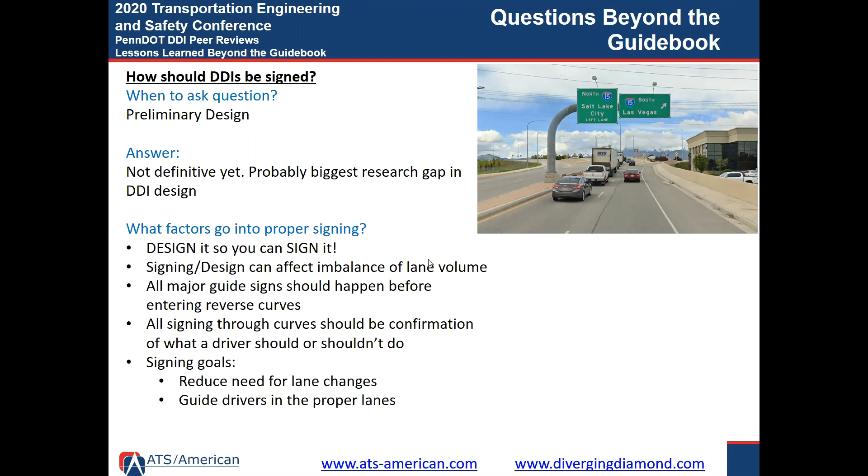Here are more examples of signing. There's actually a lot of different examples, but I'm not going to have enough time to go through them all. There's a lot of information in DDIs that you need to convey to the driver. You need to convey it before they go through the reverse curves, because once drivers go through curves, they're paying more attention to the curves than the words of the signs. So they've got to get in the proper lane before they start entering these curves.

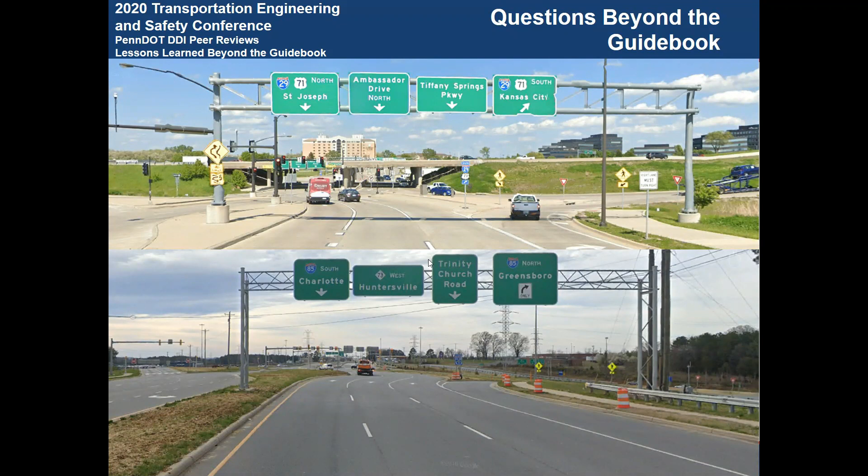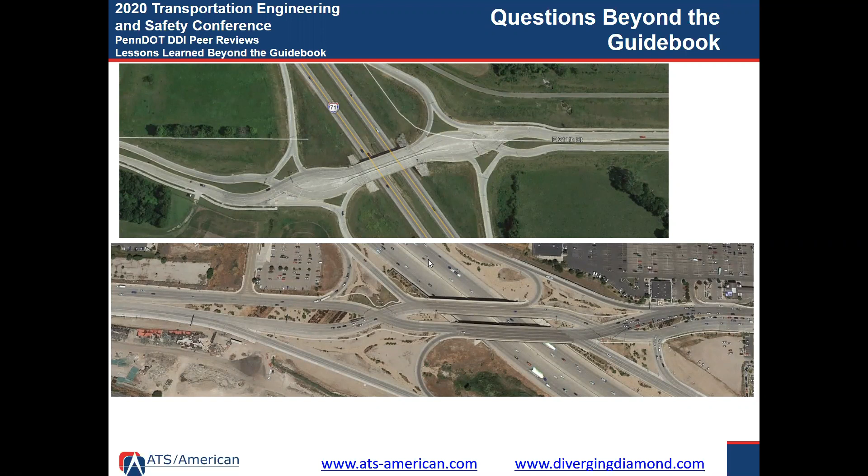But if you look at the one to the south, in Utah, you see that the one-way alignments were designed separately, and you can get much smoother alignments through here. And the last thing is, where should pedestrian crossings be located?

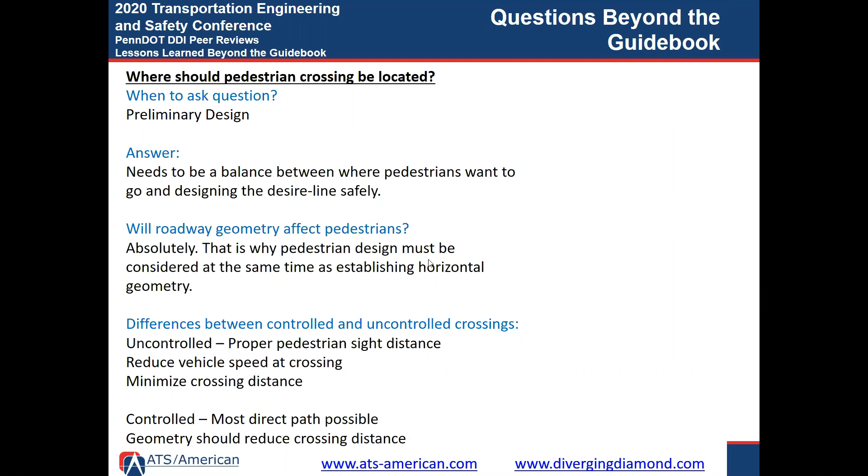There really needs to be a balance between where the pedestrians want to go and designing the desire line safely. This is something that I worked on for the new guide for pedestrians and bicycles. And the first thing that we really want to do is make sure you have proper sight distance. We see too many crossings, and this is not just DDIs, this is all over the place for other interchanges and intersections, where you just can't see the incoming traffic, or the driver coming in can't see the pedestrian. So you first have to make sure that you have proper sight distance.

So I prefer more like this design, this is in Kansas, where you have a direct crossing all the way across. The ramp for the right turn is very close to the crossover, and so you can get directly across over here. For an uncontrolled crossing, you want the speeds to be very low at the crossing. So I think this design is a great design. This is in Kansas.

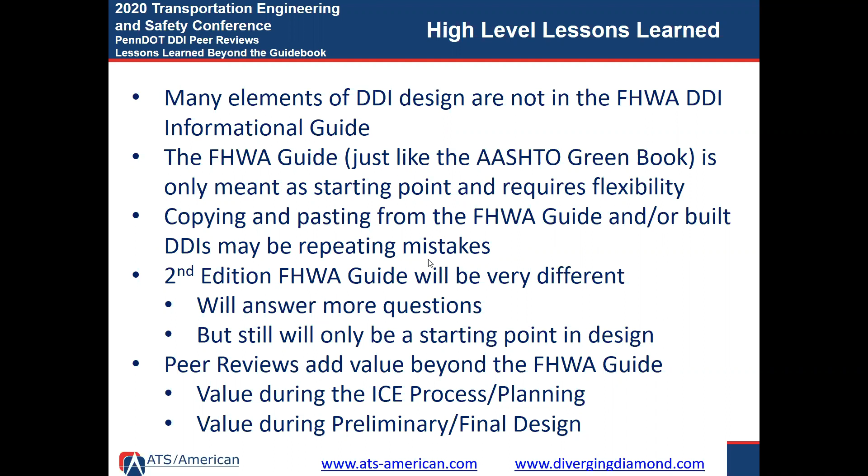So lessons learned: many of the DDI design elements are not in the informational guide. Copying and pasting from the guide or built DDIs may be repeating the same mistakes. Some of these answers are going to be shown in the second edition of the Federal Highway guide, but it'll still only be a starting point. So these peer reviews are really valuable for information that's not in the Federal Highway guide, and can be valuable during the beginning phase, during the ICE process of planning, to see if the DDI is the right solution, and very valuable in the later phases to make sure that you design the details safely.

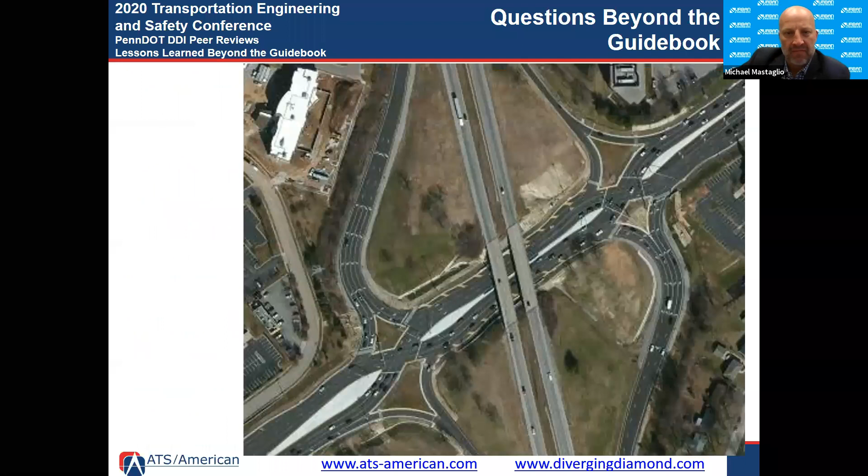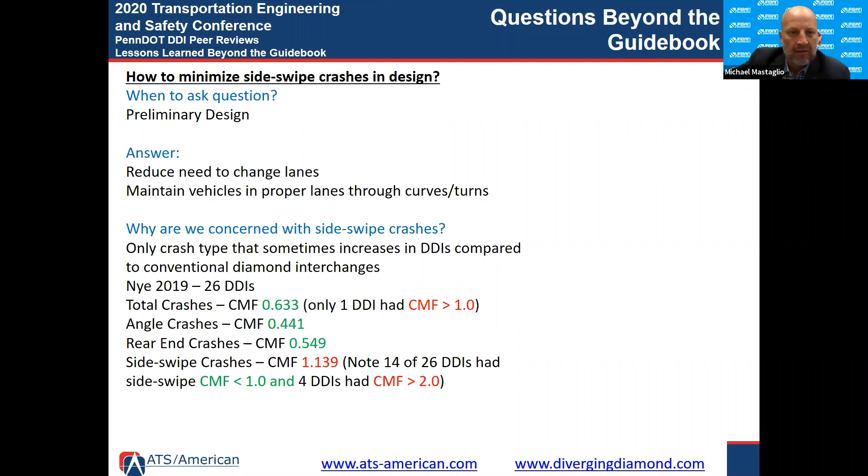I'll take questions, if there's any chance for questions. Yeah, thanks, Gil. Really some good lessons learned and some nice design, geometric and operational discussions here. Gil, can you go back to your slide real quick? I want to ask one question before they cut us off. It was the sideswipe slide, and you mentioned the crossover angles not necessarily being a hard criteria anymore. Can you go back to the sideswipe slide and re-explain the curvature and the cars going through the crossover? At the end of the day, we want nice natural driving paths, and we also want people not to have the ability to go the wrong way down the crossover. So I had a hard time visualizing why the sideswipes were occurring in the example project.

So in this example, we don't have reverse curves. It's very tight to get through the crossovers in this DDI in New York. So let's say you're going up here as a driver, you get to that crossover and you're very quickly curving to the right and then very quickly curving to the left. Maintaining the lane in that situation is very difficult. In many DDIs that are designed well, we have wider lanes with the crossover and curves that are well designed so that you can maintain your lanes. And it's not just through the crossover, but also from the ramps, making the left turn or the right turn into the arterial. You want to make sure your design vehicle is able to maintain the lane so that we don't cross into different lanes and then sideswipe.

The other issue for sideswipes is when your signing is poor, you have more changing of lanes, and in general, the increase in lane changes will increase sideswipes.